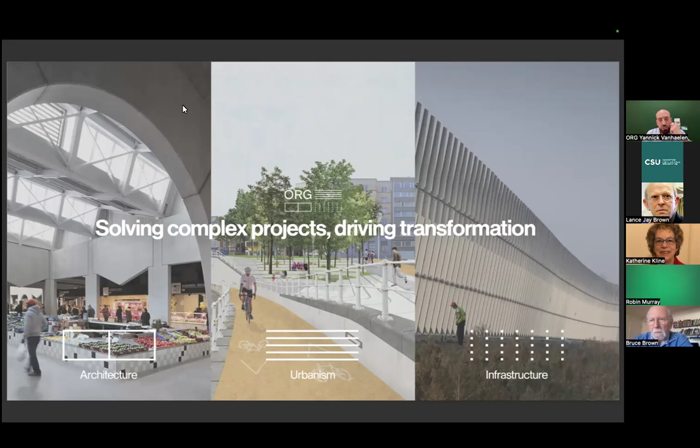In order to realize those transformative projects, we believe three pillars are necessary. Of course we have the spatial expertise with design and planning thinking as designers, architects, and urbanists. But we also need technical expertise, and increasingly we use advanced analytics to help the decision-making process by analyzing large amounts of data and evaluating scenarios, to make sure we can reach consensus and base our vision on factual information.

And then if we want transformative projects, we also need to take care of the social pillar, and have expertise in process and implementation management, so that we can get feedback from the users, inhabitants, and stakeholders, but also guarantee that those transformative projects have a large base of support so that they get realized at the end.

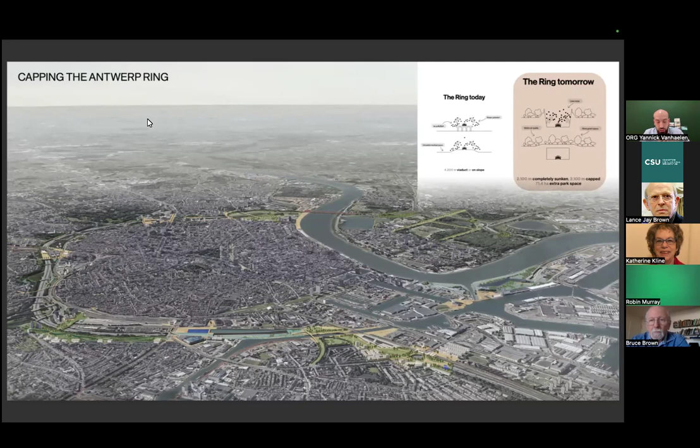It's with this kind of approach and spirit that we are working on complex infrastructure projects in Europe, like the capping of the Ring of Antwerp, the second largest city of Belgium, where we are curating the studies to put most of the ring underground, making way for more qualitative public space and new green spaces to mitigate noise and pollution, and to pave the way for more sustainable modes of transportation. Considering the massive scale of this infrastructure project, which also aims to link the city center with its suburbs, it has a big impact on the city.

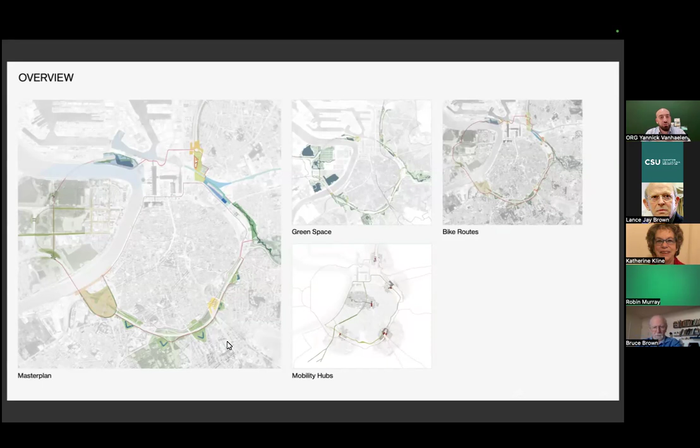It's a project where we did massive stakeholder management and participation process to make sure we get feedback on our ideas and designs from the users, but also get a large base of support so that we can actually get this necessary project realized in Antwerp.

Another kind of project that maybe illustrates more this idea of advanced analytics is this modal shift project we are doing around Antwerp, which aims to reduce the use of cars, the modal share of cars, to 50%, and for which we developed a specific custom-made computational model to help us evaluate and assess potential investment projects in infrastructure, to make sure we can make the right choices to reach that result of reducing the modal share of cars.

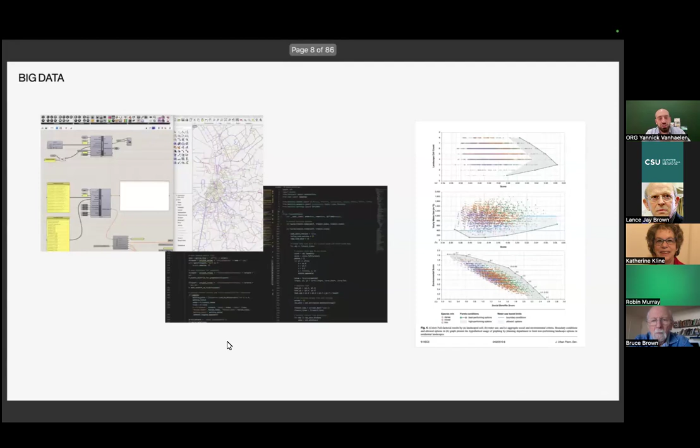The end result is a report that illustrates how different infrastructure projects, like tram lines, new bike routes, or bus routes, can have an impact towards reaching that goal, and which investments should get more priority than others because they are more successful in achieving that modal shift.

This just illustrates the kind of projects we do that aim to have a transformative impact, and that will also take time to get realized. That's why we think of our projects like cathedral projects, taking more than one generation to get realized, but that we also need if we want to move toward more sustainable urbanization.

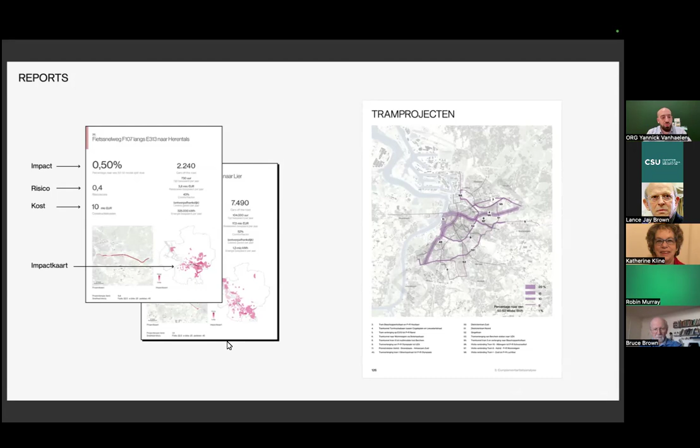That's also the kind of project the public space manual is, which I'll focus my talk on today. It's part of the framework of the green books, and the cover of the manual is also green, so that makes perfect sense. It's a manual we developed together with Bureau Bas Smets, a landscape designer, and with the expertise of various experts in mobility, material reuse, ecosystems, and...

You're muted. Okay, I'm sorry, I apparently muted myself.

As I was saying, the project we did for the public space manual, we did with Bureau Bas Smets, the landscape designers, and with the expertise of many different experts, because you need many different kinds of expertise to design public space today. It's a manual we developed for our client, Urban Brussels, the public administration responsible for everything regarding urbanism, who also delivers permits, etc., in Brussels. I'll talk a lot about Brussels.

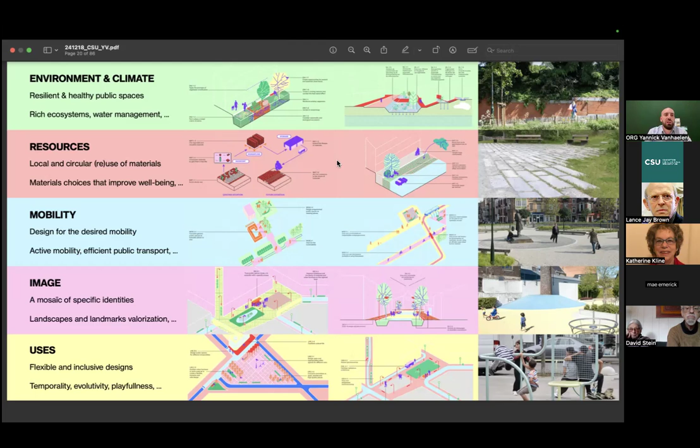In terms of environment and climate, the goal is to make sure that Brussels can be and stay, or become, resilient and healthy by really reconsidering natural spaces as an integral and connected part of urban spaces. So to reintroduce green space and qualitative green space into public space to help mitigate the many negative consequences of climate change - the heat island effect, floods, carbon emission, biodiversity, etc.

And so for each of those ambitions, we give specific recommendations on how to create rich and complex ecosystems in your city, in your street design, in your public space, how to integrate sustainable nature drainage systems to reduce the risk of floods, how to choose the materials you are using so that it has less negative effects on the environment, etc. So that's for environment and climate.

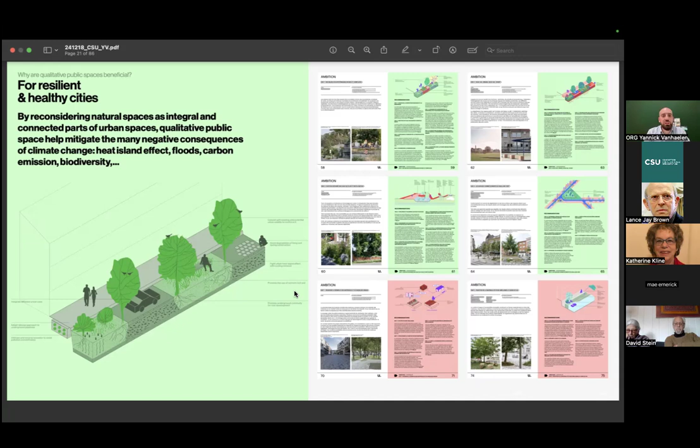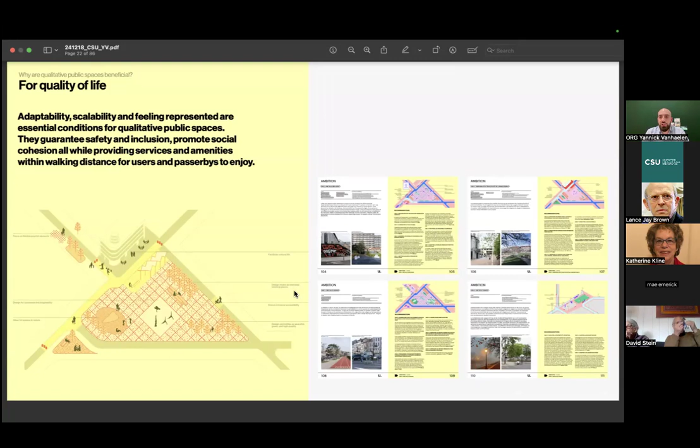We have the same kind of ambitions and listing about the quality of life. So how to make sure that your public space is adaptable, where everybody feels represented, how they can guarantee safety and inclusion, promote social cohesion, while providing services and amenities for all of the inhabitants and users of the city. We also have ambitions about identity or placemaking, because it's an integral part also of urban design.

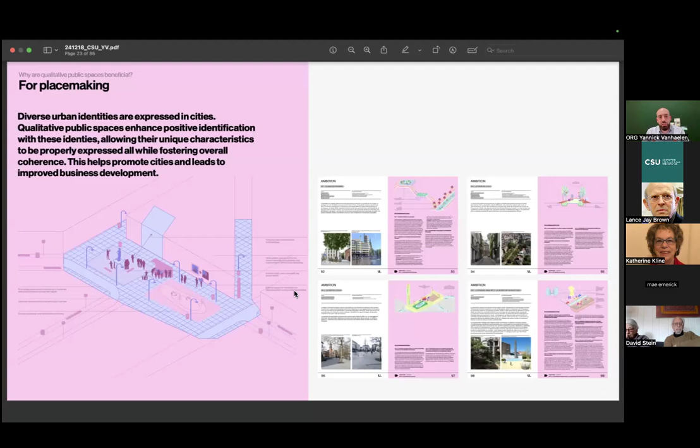People visiting Brussels will notice there is a very strong diversity in morphology and identities. How can this be expressed in cities, in public space design, making sure the public space helps give a positive identification for inhabitants to be happy to live where they live, and also how to treat heritage buildings or heritage public spaces in new redesigns.

Lastly, but very important, how we make sure the city maintains its productivity. Cities are places where we create value. In order to create value, we need to integrate a lot of networks, have access, and make sure all those networks guarantee the smooth operation of businesses and bring diverse groups of people together. So how to share the space between different modes of transport, so everybody feels safe and can go about his business in the city.

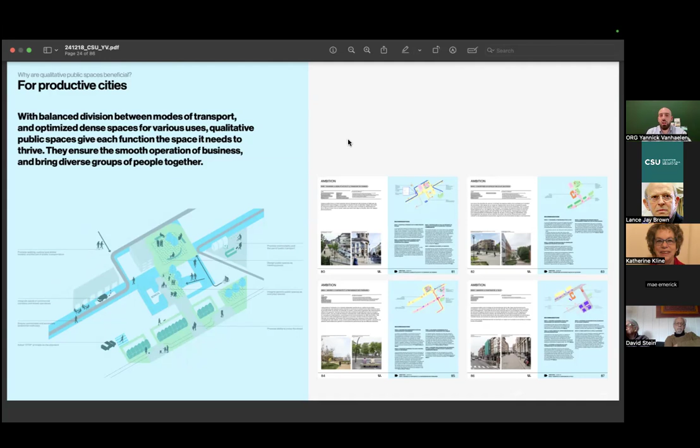How can we make sure that sustainability is also economic? It's not only about climate or social cohesion. So that's a quick presentation of the content of the manual. I will now explain a bit why we need that manual, and what are the key challenges in public space design.

The first challenge we see when designing public space is this addition of functions or needs. Public space needs to accommodate a lot of different functions in a very constrained space. You have the movement function, the ability to move and access the city. You need the place function, the ability to sit, enjoy, stand, play, exercise, gather, participate, to even consume.

What makes society and cities worth living in. You need inclusivity, the ability to be yourself, to feel safe and relate to others, particularly in a city as diverse as Brussels, where you have many different cultures. You need the function of climate regulation and ecosystems, just to survive, to be healthy, and to support and develop biodiversity. And then this function of placemaking, identity, and legibility, the ability to read and recognize your environment.

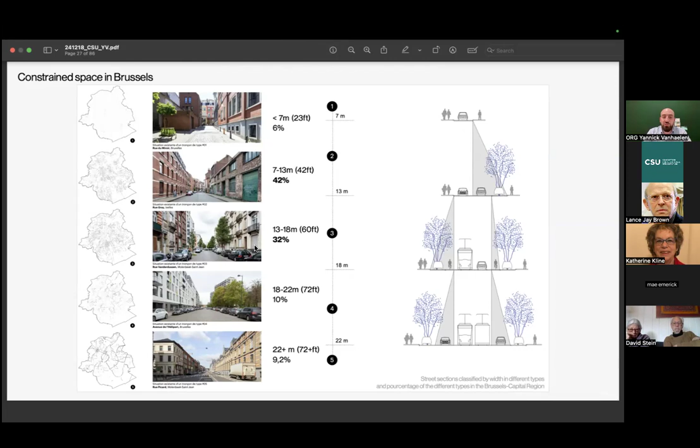So that's the first challenge, this addition of functions and needs, and it's actually getting worse because the spatial demands have been growing. For example, in terms of movement, we have more and more modes of transportation, and it's an addition. There is not one mode of transportation replacing another; we are just adding different modes.

So of course we have walking, but now we have steps, bikes, scooters, cars, trucks. They all require space. What's more is we've also seen an increase in the size of vehicles, so it's even more challenging. In the same space, you can actually fit less stuff than you were able to before.

And then, of course, some necessities need more space today than yesterday, because we realize if we want sustainable development, we need to give them space. For example, climate regulation: if you want to really create ecosystems that work, spaces that can infiltrate water and avoid floods, you actually need more space for that than you used to need just for the aesthetic approach of a lane planted with trees.

So this addition of function is primarily the biggest challenge. It's how do we divide the space for the different functions that we need to have in the city.

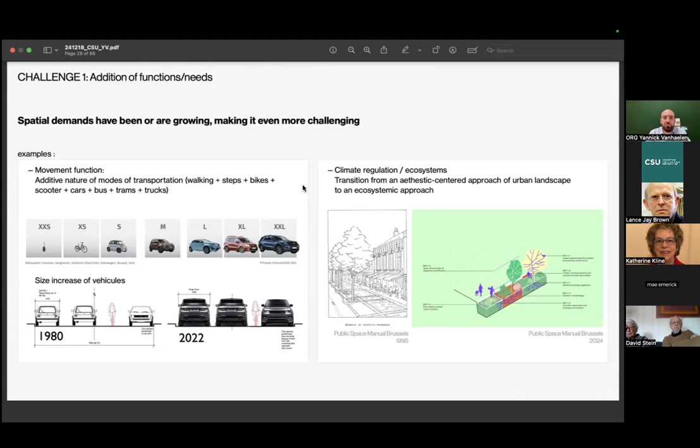The second challenge is that we have many agencies involved in public space. So when you need to decide on this space allocation, you need to agree with a lot of different stakeholders who all have oversight responsibilities or interests to defend, and of course are fighting for their own space, for their own stuff.

And so you need to be able to agree with all of those stakeholders on a potential redesign, and that takes time and effort.

What's more, and that's the third challenge, is that most of those stakeholders also have their own regulations, policies, or norms that they want to enforce in public space. Some are even contradictory. We listed all of the regulations, norms, and reference documents that you actually need to know in order to design public spaces in Brussels, and we came up to 167.

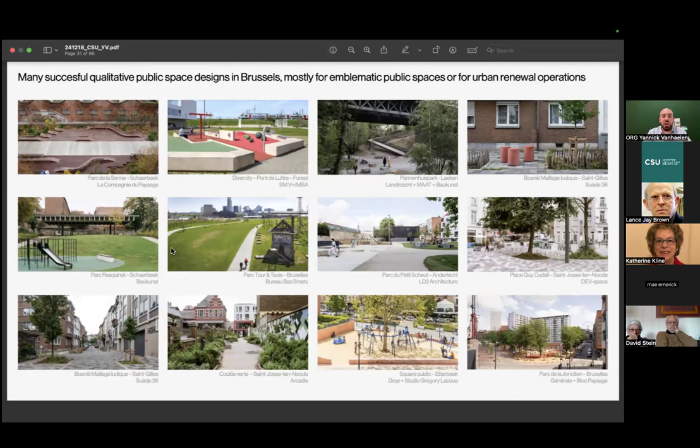So the question then is how to guarantee a basic quality level for those public spaces, because it's clear that the public authorities don't have sufficient means to organize competitions and follow up the design work like they do for those emblematic public spaces, where you organize a competition to select the most qualitative architects, and then have those kind of integrated process where all of the stakeholders follow the development of the project. It's impossible to do at the scale of everyday public spaces.

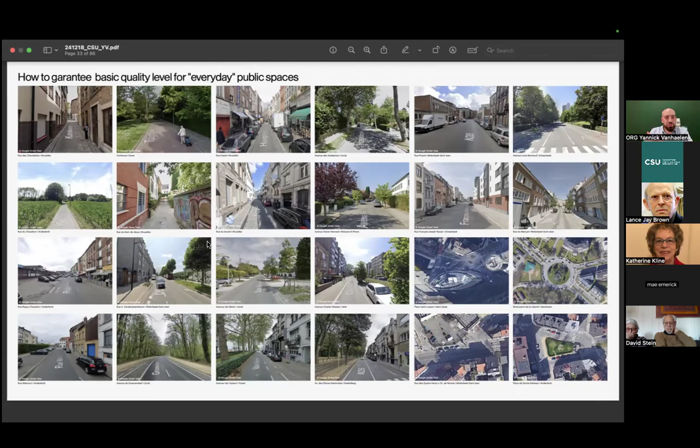For all of those normal, everyday public spaces, how can you guarantee the basic level of quality? That's, in a way, the goal of the manual. It's to facilitate all of those questions so that you don't need to ask them and can directly go and design the public spaces, making sure the level of quality is already integrated from the start, so that public authorities don't need to ask for changes all the time to get to a basic level of quality.

Of course, there are already many existing guides, manuals, and vademecums, but the issue is they are too specific to one theme. For example, we have many guidelines on how to design a bike lane, a different document for a bus lane, and a different document for sidewalks. But when you group them in one street, they don't fit together. So you need to integrate all of those manuals and guides, or they are too abstract, etc.

So, in a way, the goal of the manual is to help the decision-making on space allocation in public space, to answer this first challenge. It's to build a consensus on the priorities and the shared vision for the future, so that we don't need to rediscuss every time with all of the many agencies involved what's the goal on that particular public space. It's also to integrate and make clear all the relevant norms and regulations so that we don't forget about them—they are integrated, and we don't need to spend a lot of time for designers and public administration to go look around for them.

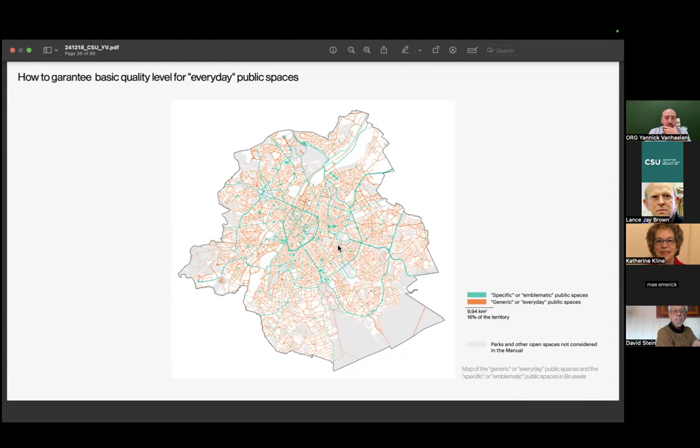And it's really about making sure that all of those everyday public spaces get this good quality level. Because the recent events make it clear that we need a more systematic approach. We have seen with COVID that actually people want to use public space for other functions than just movement. It's part of their daily life.

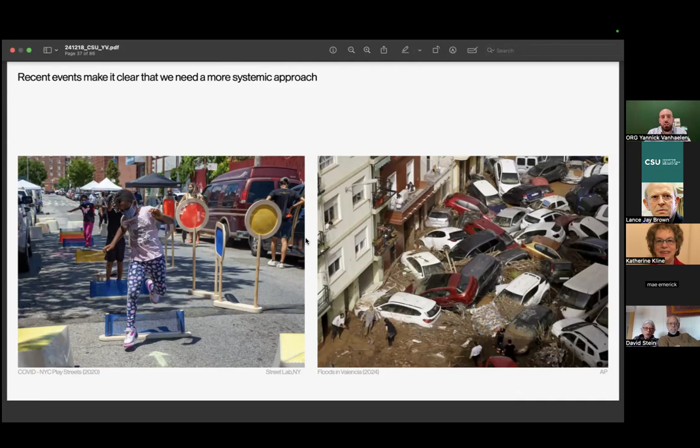And we have seen, like recently with the floods in Valencia, that if you want to tackle climate change and make your public space more resilient, you need a systemic approach across all of those public spaces in order to mitigate the risk of those kinds of effects in your city. So we really saw the potential for real transformative impact by tackling those public spaces. So it's a question of resiliency, of course.

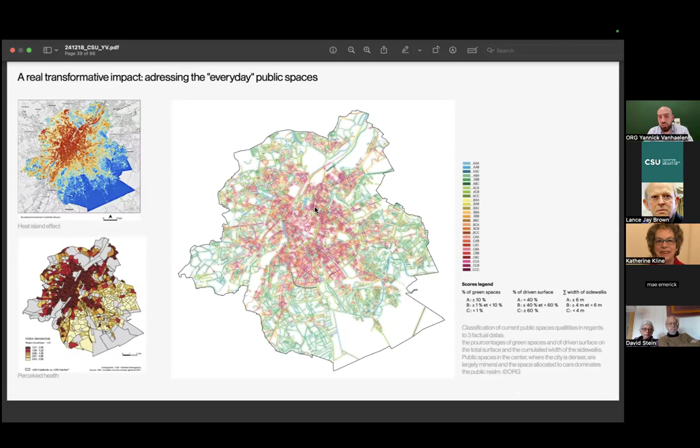It's also where you can see with science that the heat island effect is more prominent and where the perceived health of people is the worst. And as I told you in the beginning, that's also where most of the lower income families live. So it's also a question of social justice. You see that in the suburbs they have more qualitative public space, but in the center, not.

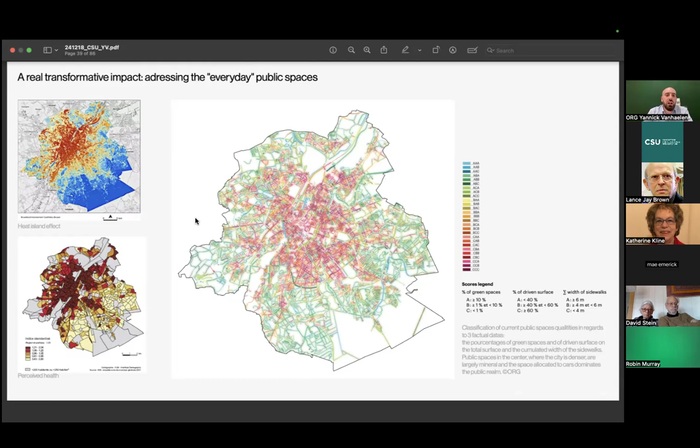And so that's also why we were interested to work on this manual. And what was our approach? It was about using those advanced analytics. It was about making this stakeholder management to agree on a shared vision. And then it was using these spatial design skills to offer concrete solutions, and of course also practical urban design tools to integrate all of those norms and regulations. So in a way, those three pillars that I explained at the beginning.

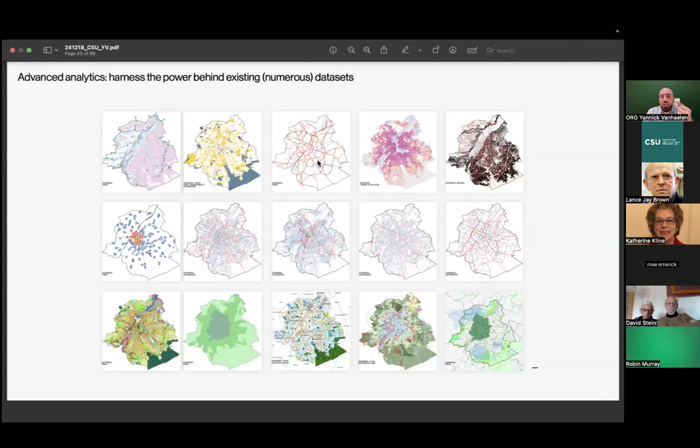If we start with this advanced analytics, in a way Brussels has many qualities, but one of them is also that they are very wealthy in terms of data. They have a lot of data about everything that they aggregate about the city, but they kind of leave it there. It's thematized and they never cross it. So we saw a potential by starting to mix and combine it, finding and illustrating what are the key parameters you need to take into account for public space design.

For example, if you assemble different maps of different strategies that they have, we can make what we call a filter. It's a map that shows where priority greening is important, so where the public spaces are where one of your focus should be about greening. Because, for example, you have in red places where we can link big parks or big reserves of biodiversity together to create a network. That's an official policy, but it's never been implemented into the public space design.

Another example is to identify all of the schools and to say all of those public spaces give access to a school—that's also a specific challenge you need to take into account. Or where are located all of the commercial activities, the neighborhood centers, where you have an intensive use of public space, where people gather, and where you can expect that your design needs to answer different challenges because of this intensive use.

Or another example, with topography and analyzing the type of soil you have underneath, where are the public spaces that are part of what we call the valley landscapes, where you know you will have a challenge for flood management and where you need to create sufficient space for natural, sustainable drainage systems to take place in your public space to mitigate this risk.

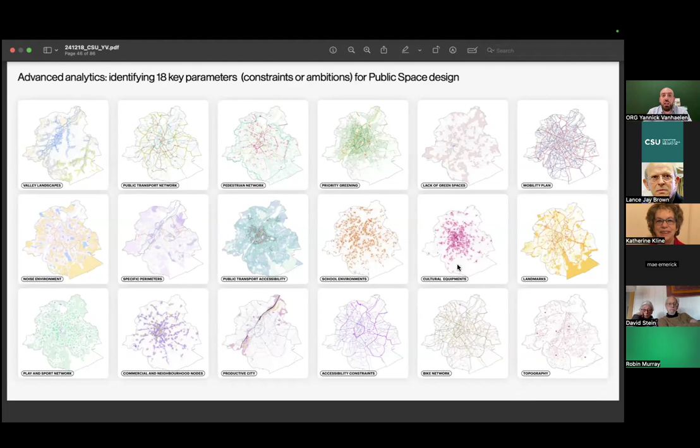And so all in all, with this advanced analytics, we identified 18 key parameters that are constraints or ambitions that designers, but also authorities, need to be aware of on public space design. Each of those is geo-located, so they are part of a database that you can easily access on this web tool that I showed at the beginning, so that you have the constraints you need to take into account to design your public space. And of course, for each of those, we identify the challenges and give recommendations and specific tools to design them.

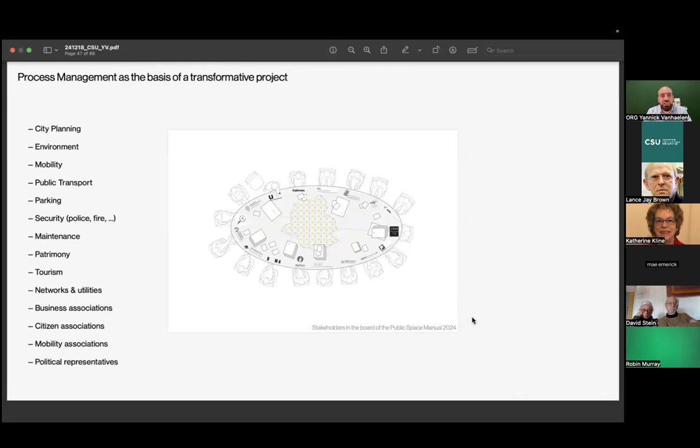The next challenge I mentioned was about the many agencies that are involved. And so our answer to that, our approach, was to make a process management in order to agree collectively on a shared vision for the future of all of those public spaces.

We did that by approaching all of those different teams separately first with all of the stakeholders, to have a workshop about the priorities and ambitions for environment and resources, mobility, image and use, and gender inclusivity. So it's a lot of meetings with representatives of all of the different administrations to talk about the maps we made.

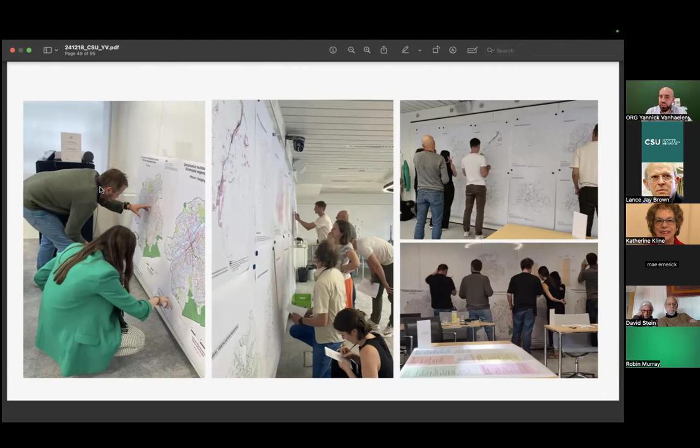To identify the constraints and ambitions, and agree on specific recommendations for the manual, we did a super workshop combining all stakeholders and subjects into one, dedicated to: now we've heard all your ambitions for your different teams, what happens if we put them together in one space? We need to make choices. We cannot answer all of those challenges in some situations because there isn't enough space, so we need to give priority to some of them.

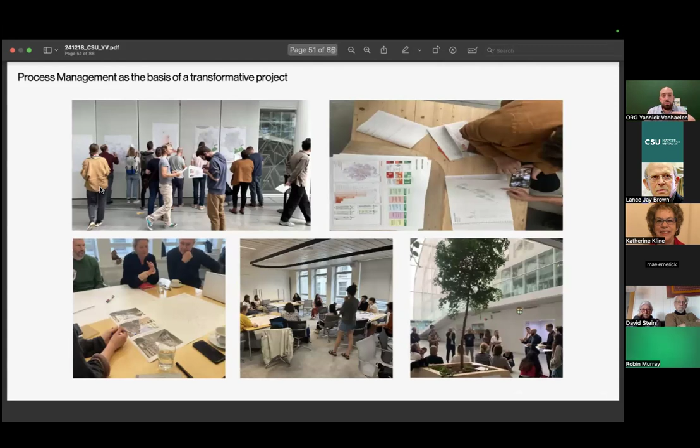I'm very pleased to say that through this process management with all of those stakeholders, we were able to agree on a territorial and transformative vision, where we identified 6 programming strategies introduced to simplify and clarify the priorities of the different public spaces of the region. So now when you open this manual, it tells you this public space's main vocation is about green continuities, or it's about centralities. It's clear, that's the main goal of your design, and then you need to integrate the rest. But if your design fails to answer that goal, it's a failure.

So for example, one of those 6 programming strategies: you have the localities, which are the public spaces that don't have to answer to any of those constraints, so they weren't present in all of those maps. It's the places where you can maximize all the general ambitions so that those everyday spaces become amazing for citizens.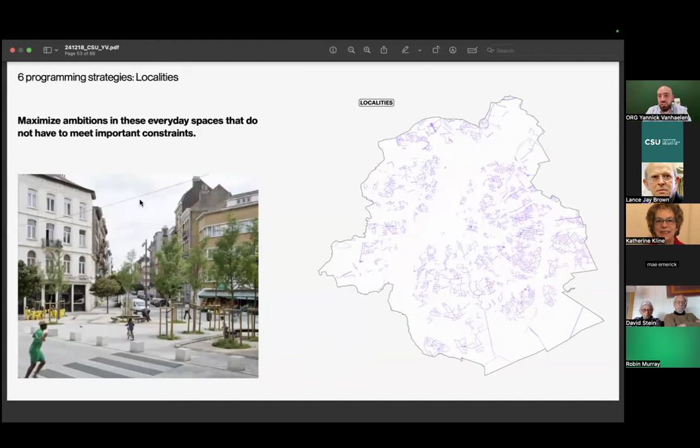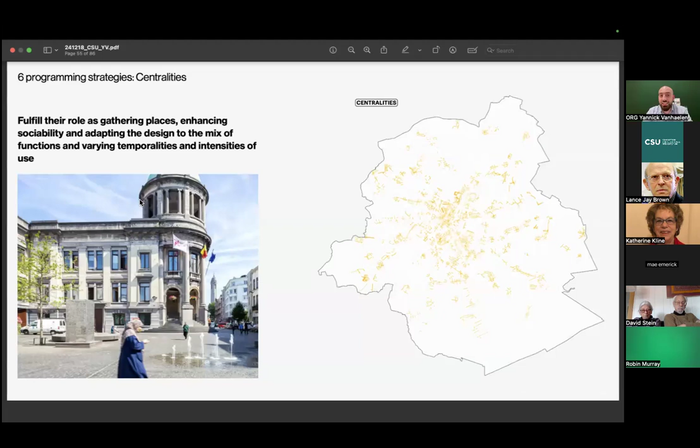You have the water city, which are basically the public spaces that need to answer to the challenge of mitigating the flood risk that I explained. You have the centralities, again, where people gather, where you need to enhance sociability and adapt the design to the mix of function and the different temporalities and intensities of uses. So it's the little neighborhood centers.

You have the school environment. I'm very pleased to say that we decided this is a priority for the region: to provide for each school a safe, healthy, attractive environment that facilitates social interaction, where you can walk with your kid to the door of the school, and know that you can play around in the public space and not be run over by a car.

And then the question of green continuities, to connect those green spaces with biodiversity value and contribute to creating a network that can support biodiversity in the long run in the city center.

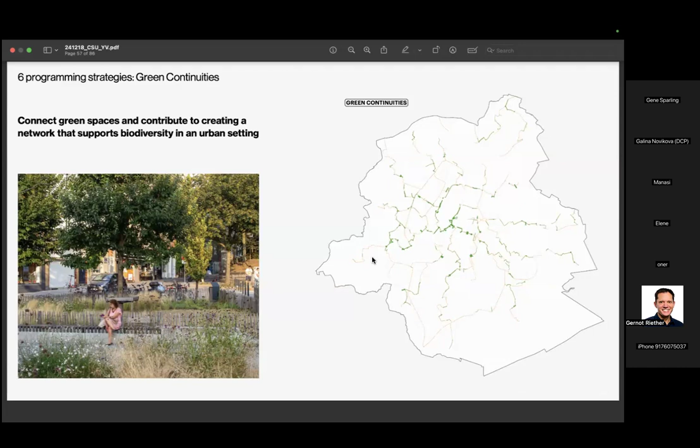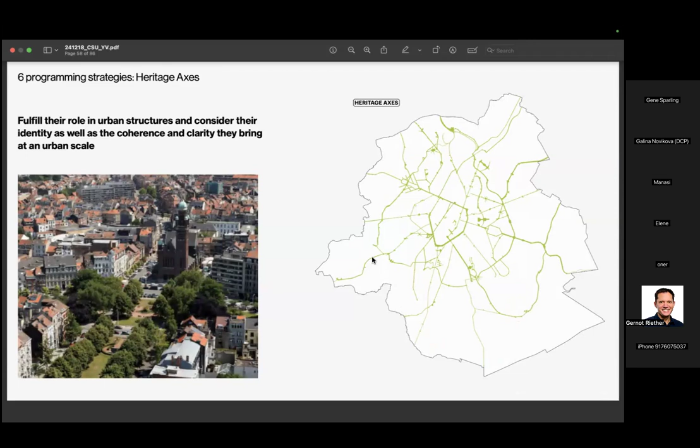And last but not least, in terms of identity and heritage, the heritage axes, which are all of those avenues and big boulevards that are actually structuring the city, that help the legibility of the city, and that need to fulfill their role in urban structure in terms of coherence and clarity at an urban scale.

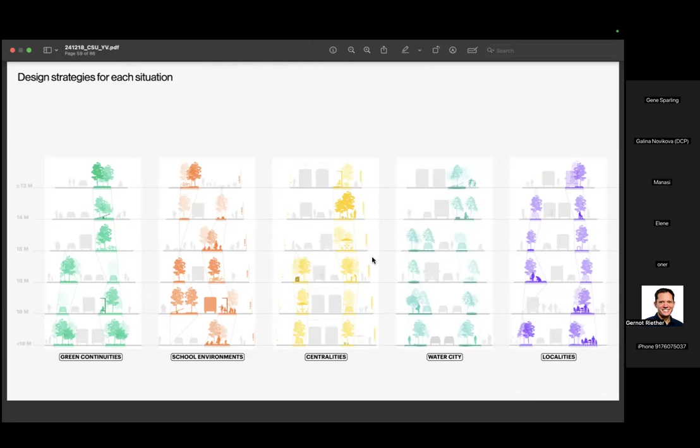For each of those design strategies, we also provide everyone who wants to use the manual with concrete design proposals, for each different width of street, for each of those programming strategies. We basically make a design of: okay, it could look like this. It doesn't have to, but that's the first stage of designing.

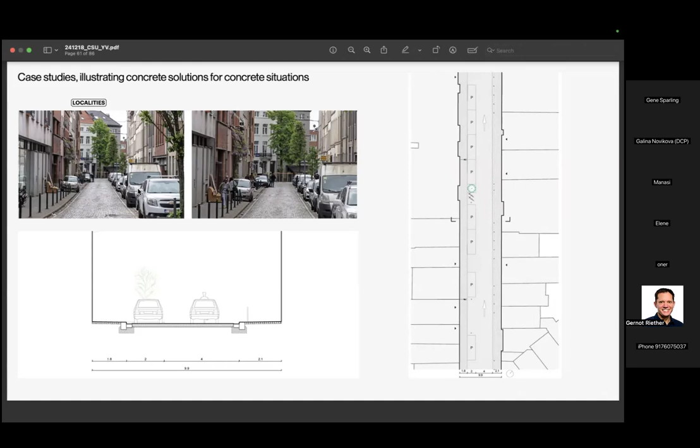And to further enhance the acceptability of the manual, we made various case studies illustrating how those concrete solutions can be adapted to concrete situations. So for example, this street is a locality in terms of programming. You see today that quality is not very present, it's mostly dominated by cars with very small sidewalks. We illustrate simply how you integrate those ambitions and programming strategies to make this space a vibrant street for daily use, where car is not dominating, it's a shared space, slow traffic, you still keep parking, etc., but you also make space for other uses, green spaces, and benches.

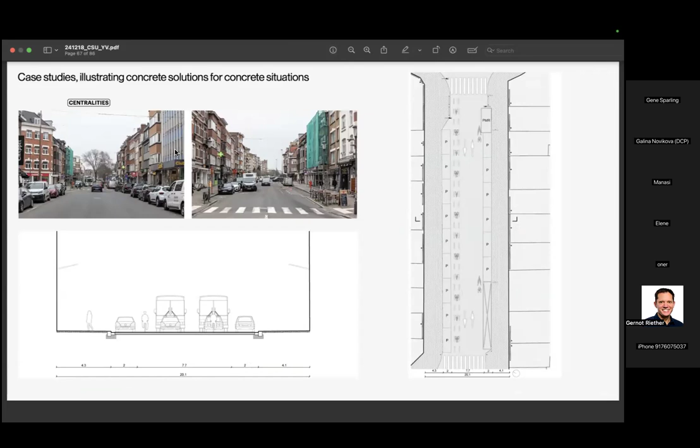Same for the centralities, where it's much more about the different uses: restaurants that have terraces in the public space, seating areas because you have many people visiting, and delivery zones for the shops. So again, an example of a centrality, a street with many shops and restaurants. Today, not a very attractive public space, not very resilient or sustainable, and how we can accommodate and create space for those other functions, green spaces, creating a better environment for businesses to thrive, because people going to a restaurant are not between car parkings, but between green spaces, which is still better. You keep some parking and you create delivery spaces for the businesses.

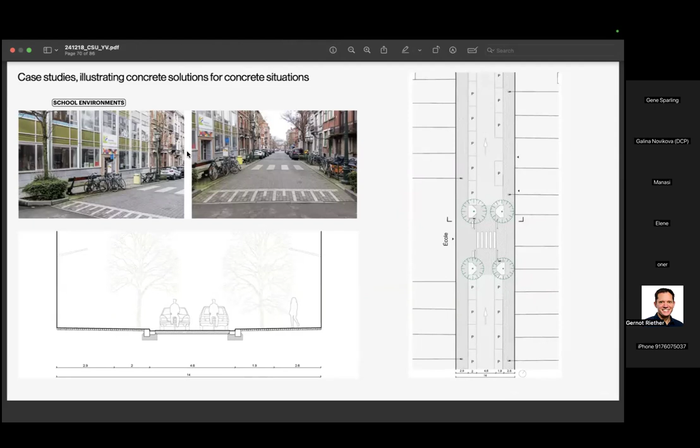And the same for school environments, where the basic ambition is to remove all traffic in front of school if possible. But if not, it's to really push the car as far away as possible from the school entrance to create a front space that can be used for gatherings and for entering and exiting the school. Again, that's an example of a school street. You have 4 trees, that's already something, but it could be much more attractive, much more safe for children and families to go there and also play during the weekend.

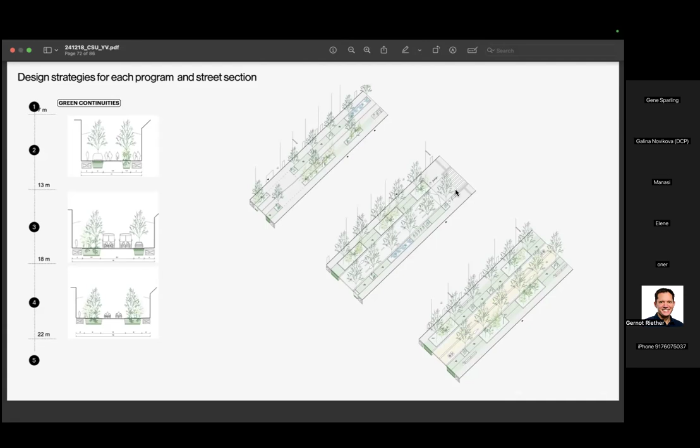Lastly, I wanted to show the green continuities, where it's really about creating those patches of green that are interlinked in the public space. Again, that is supposed to be a green continuity if you look at the strategic plans, but it's really not. But it could be if you apply the recommendations and guidelines of the manual.

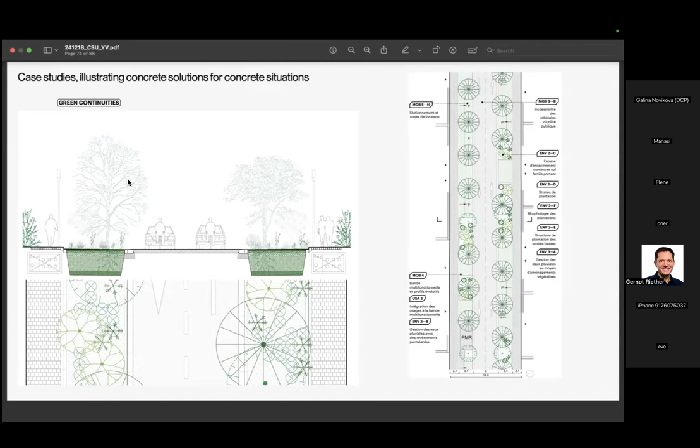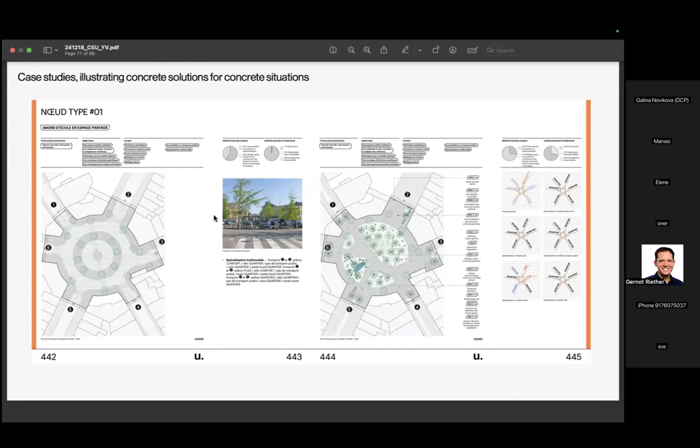We did the same for the crossroads, the nodes between different streets, when they come together, what do you do? Again with examples and practical illustrations of the various strategies.

And then we also provide the users with a toolbox of practical urban design tools. As you see, there are many of them, divided by the different themes: environment, materiality, mobility, identity, and usage.

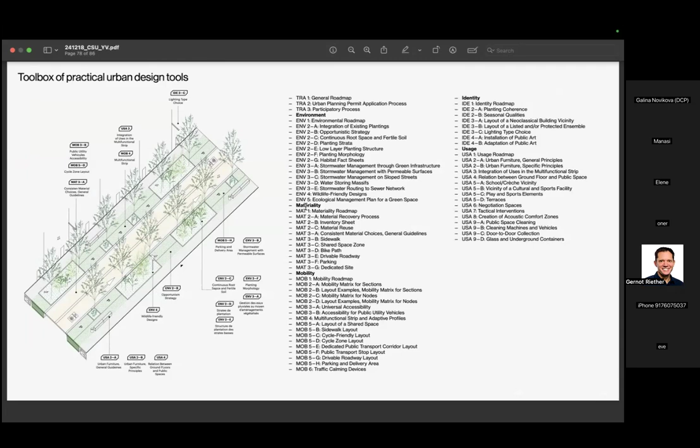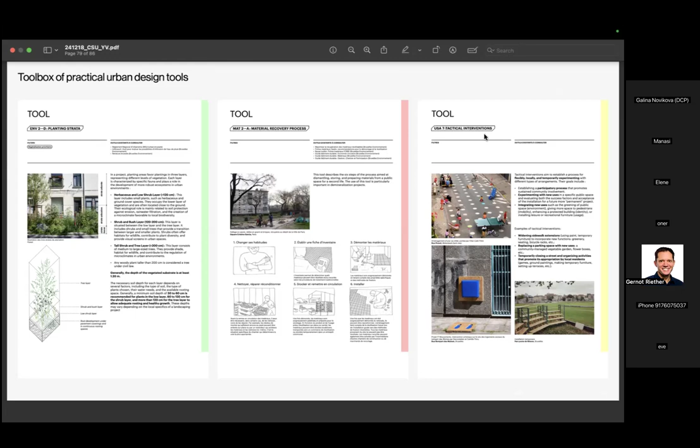I'm not going to go into detail. I'm just going to show a couple where we give a practical tool about how you can make sure that what you are planting develops a meaningful ecosystem, by making different strata of plantation, so you have low vegetation, middle vegetation, and higher vegetation, which also helps reduce the need for maintenance. How you can make sure that you reuse the material of the public space in a more circular way. Or how you can make tactical interventions to test possible redesigns of streets and potential uses.

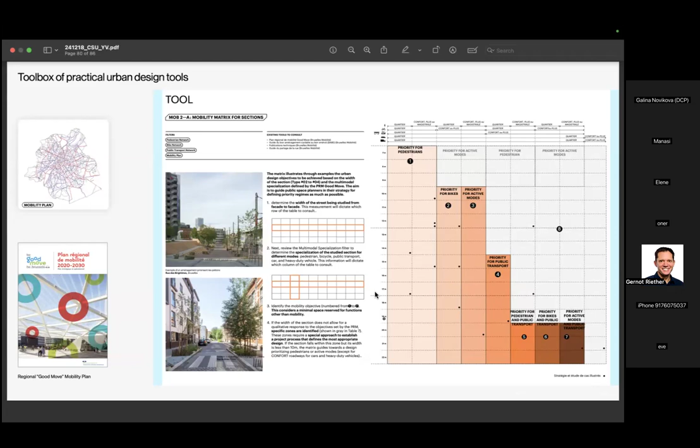There are more detailed and developed tools, like for example a mobility matrix, which for each street width provides what should be the priority in terms of modes: pedestrians, bikes, active modes, and public transport. It integrates the mobility plan that the region developed, mixed with the width of the street, so that it's clear your design should prioritize pedestrians if the street is below 10 meters. That's it. And then you have various options depending on the width and the type of hierarchy in the networks. And then you also have tools that can be put together.

They are part of different themes, but for example, in terms of parking, it's a huge challenge how to diminish the space for parking and create space for other functions. What we recommend in the manual is to work in an evolutive way: don't try to reduce parking fully from the start because there will be a lot of opposition, but rather make everything ready so that when there is less opposition, you can easily transform what we call a multifunctional strip and accommodate other uses or extend the green. It works by integrating already in the foundation a continuous root space and fertile soil underneath this strip that can potentially welcome different kinds of uses. When you are already certain that there is the root space and soil needed for the green development, that can also help infiltrate the water under the street.

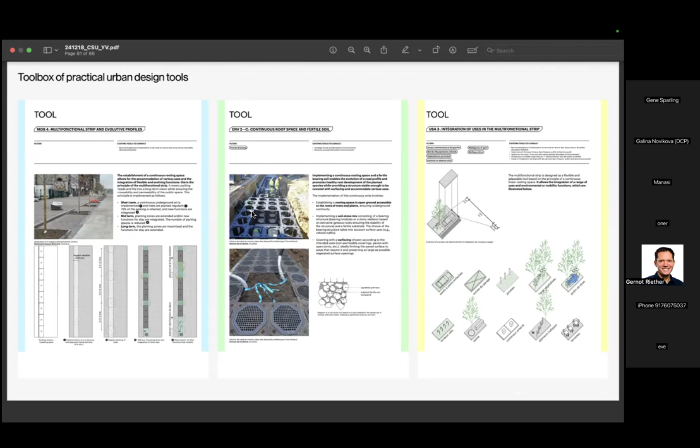So those were a couple of examples of the content of the manual. To conclude, for us this is needed in order to realize transformative projects: to really integrate not only the spatial aspect, but also the technical and the social aspect, to make sure that they can actually be realized and don't end up being put on the shelf like many visions.

We are very happy to have been able to work on this manual that has a transformative vision based on advanced analytics, which base discussions on factual things and help in decision making, and also help the user friendly experience, where you go to a web page and click on the public space you want to redesign, and get everything you need.

To conclude, qualitative public space necessitates very detailed and integrated technical work, because it's all about optimizing space allocation. That takes effort, and it's not easy—you really need to get into it to play with the different elements and make room so you can create a more sustainable future for your city. We believe this methodology used for this manual can be copied and used in many different situations.